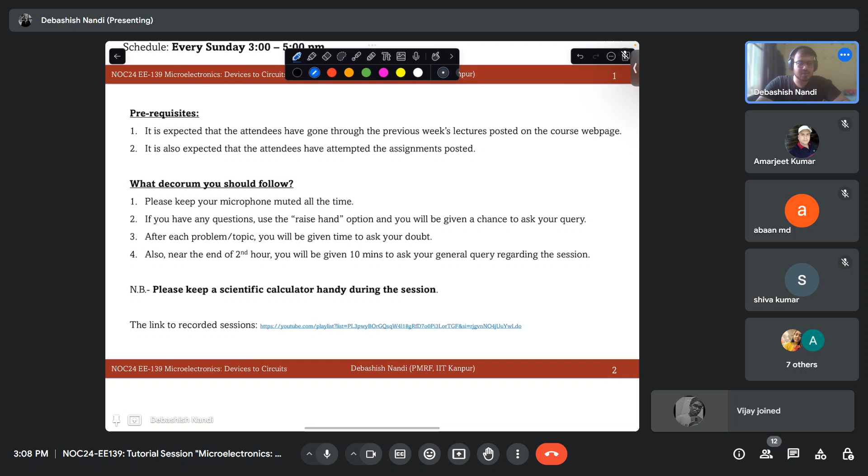So the first question is, before going to that, let me just ask you one thing. This I intended to cover last day. We see these PN junctions drawn, these BJTs drawn like this, right? So can anyone tell me, is BJT a planar device? How is the technology about? By the way, what is a planar device and what is a vertical device?

Does a BJT look like this only in real life when you fabricate them? No sir. So how does it look like? It is actually vertical, like they are fabricated first N, then P, then N.

Okay, you mean to say we will have an N plus, then we will have a well of, let's say this. So what is the bottom part? Which one is that, emitter or collector? What is the substrate that we will work on? Sir, the bottom part is base, then we come to emitter, then I think inside the collector comes. So this is your collector, right? Let's say this is your lowest doping part.

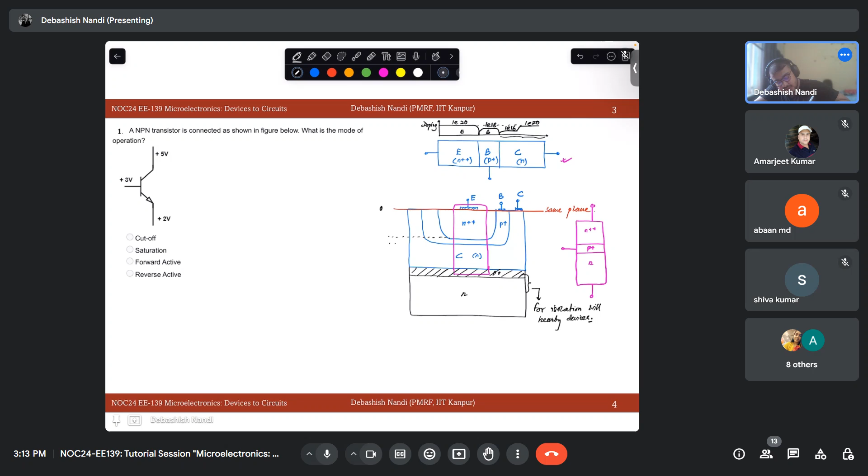These wafers are very thin. For example, if I take this point as 0, the dimensions are typically, let's say, 2 micrometers here, 3 micrometers here. You see that the base should obviously be narrow - we discussed this last time and we'll touch upon it today. Then let's say this is 10 micrometers, and then for the rest we have to break the scale, otherwise I cannot write on the same scale. Let's say it is 200 micrometers.

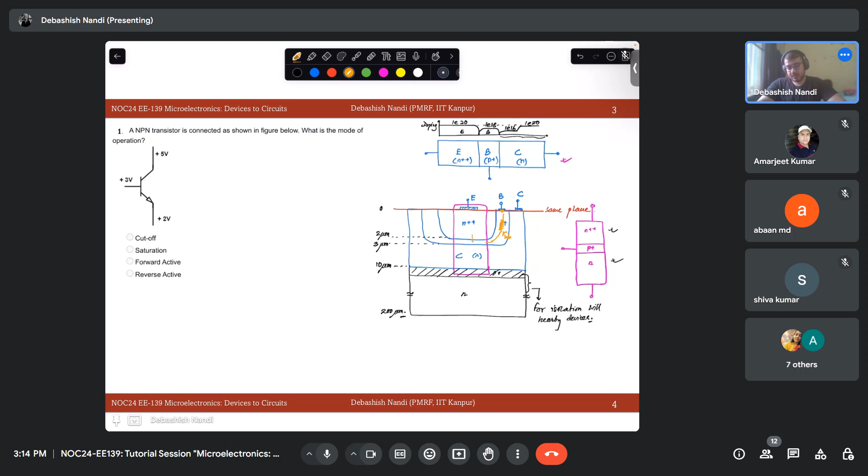So we are talking about just this much of the device. When you go to the physical device, there will be so many other effects. For example, let's say your base contact is here, but you are considering your transport at this point. So there will be a series resistance associated with this - we call it RBB. This comes into picture in high frequency operation, and there are other capacitances involved that determine your FT, meaning unity gain frequency, F max, etc. of the device.

Now let us discuss the regions of operation. What do we have in a BJT? We have two junctions: one we call EBJ, the emitter base junction, and the other is the CBJ, the collector base junction. Based upon the condition of these two PN junctions, we can have four regions of operation in a BJT.

So what are those? Regions of operation: we have EBJ, we have CBJ, and then we have the operation mode. Let's start with both reverse biased. Then what will happen? What is the operation mode?

Anyone? You can unmute and answer. Cut off. Why do you say so? There is no current. Why will there not be any current?

Why, let's say, take your emitter base junction - it has to be forward biased. Why do we need that? The electrons or holes are coming from emitter to base - for an NPN transistor electrons will be injected forward, so you need injection of carriers across this point. We know that in a PN junction, we have to have forward bias over and above equilibrium to have injection of carriers so that the excess minority carrier can reach the other side. And how does that happen?

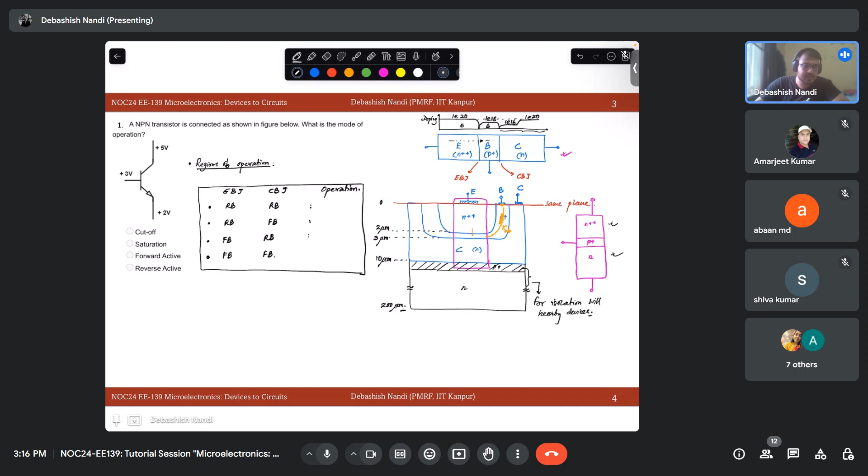If you remember your PN junction band diagrams, let's say this is your P side and this is your N side - or I should draw it differently since I was talking about NPN. So how does your carrier move? You have a metal contact at this position. Now you are applying forward bias to this junction. So what will happen? Your energy barriers will come down - this is your applied forward bias.

Okay, this is your applied forward bias. Let's say this is qVBE. This is your emitter, this is your base. So if this much energy is reduced, what happens? This is what scale, by the way, in the band diagram?

What is this energy axis? What energy? Energy is energy, not sufficient. It is electronic energy, right?

It acts weirdly, differently than a voltage. Voltage, or potential, as I mentioned last class, is defined in any field as the work needed to bring a positive charge from infinity to that point. So potential is associated with a positive sense. That means if this point has higher potential than this point, you can tell it has higher positive charge in some sense. But in the energy band diagram, what we plot is the electronic energy.

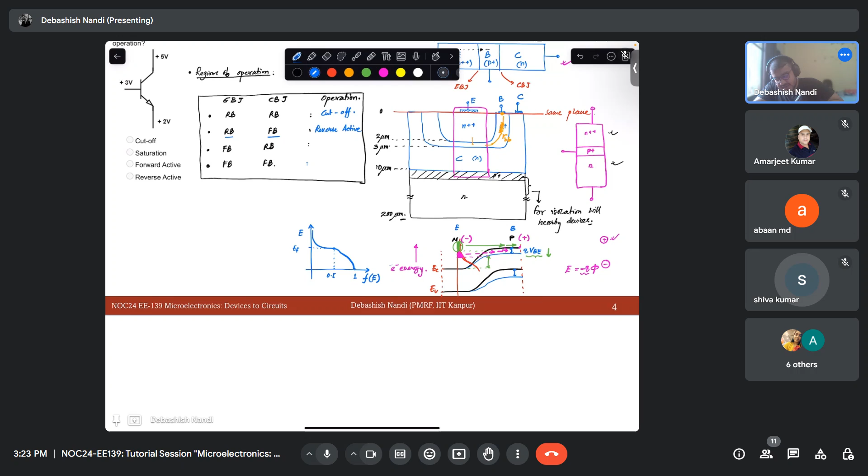Reverse active, right. Reverse active means your emitter-base junction is reverse biased and your collector-base junction is forward biased. That means all the considerations made by making this region highly doped and this one less doped are reversed. That means it is a very bad transistor, but it is still a transistor, just a very bad one in active region. So this is reverse active mode.

So there are very niche applications in earlier days when reverse active modes were used. Nowadays this mode is just not used at all for that sake. And what is this mode? This is the most common mode of transistor application.

Forward active. This is forward active, right? And this is the region where most of your amplifiers work. And what about when both of them are forward biased?

Saturation. We'll see why it is called saturation and what are the large signal models of saturation.

Okay, so now what is happening? Last class I told you how to read the notation of the transistor. So this is an arrow this side, this will be your P side, this will be your N side. So obviously this is P side, this is N side. So it is an NPN transistor. This is between emitter and base junction. This is your base, this is your emitter, this is your collector.

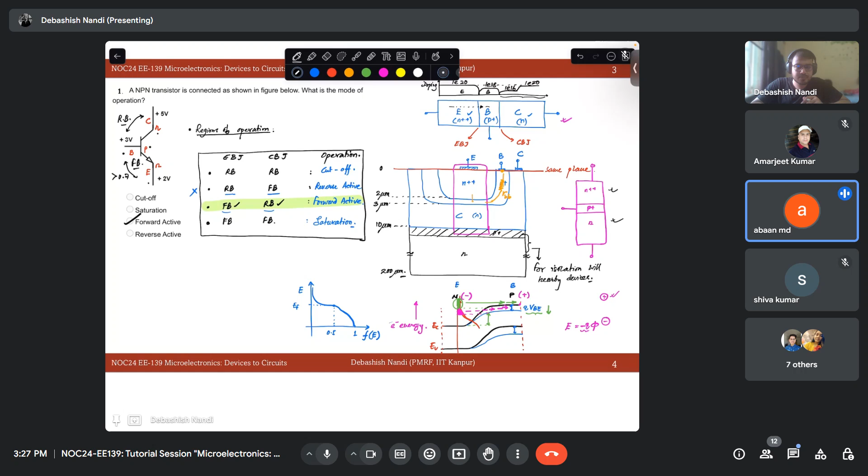A base should be less doped, but in the profile, collector should be least doped. Yes, you see that profile, right?

This is highest doping, then this, then a very small region in the collector has small doping. Then to avoid the series resistance drop, because resistance is proportional to rho, that is 1 over sigma. Sigma is proportional to n doping times charge times mobility. So if you reduce doping in the collector, resistance will increase. To avoid that, you make a very small region in the collector less doped, and then have a sudden jump in the doping similar to the order of the emitter.

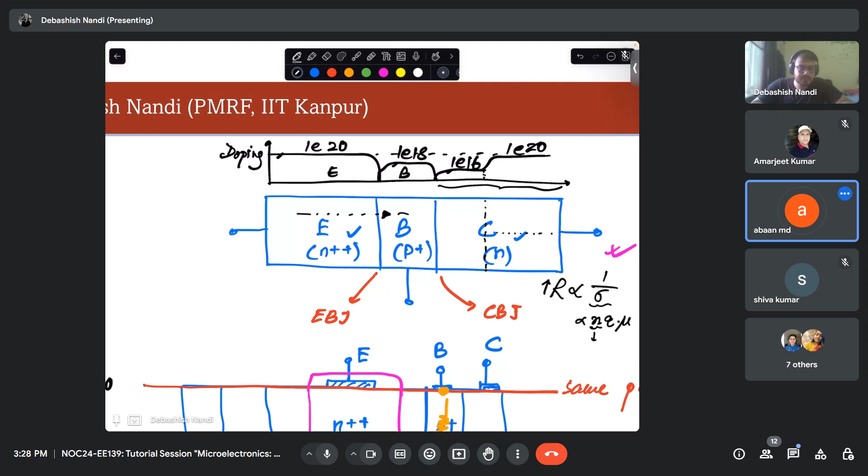Okay sir. So yeah, in this context, we are discussing amplifiers. We will be discussing amplifiers today. So it is the right time to discuss why the forward active region is used for amplifiers and how BJT amplifies. It's an open discussion, so anyone can chip in.

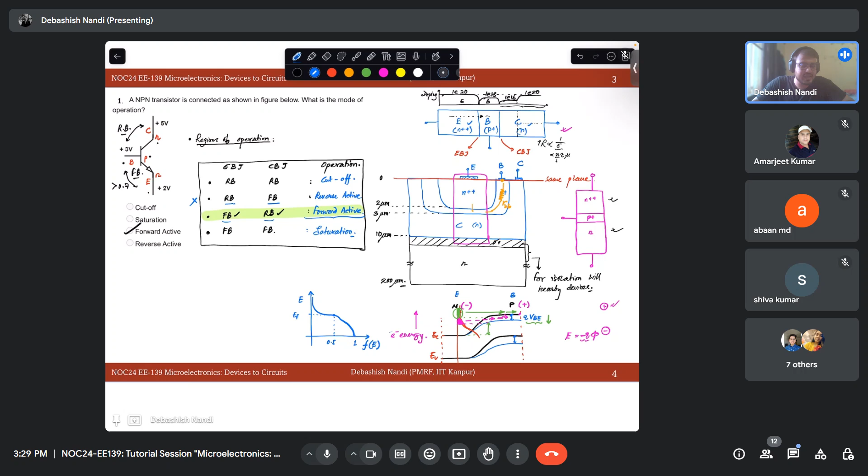So the question we are asking is why BJT, for that matter, let me put it this way: why can BJT be used as an amplifier? Question number one. Question number two is why forward active mode.

So what is the most important thing required for amplification? Can a diode give me amplification? And what kind of amplification are we talking about? We are talking about power amplification. If I put a small signal, my output should be something bigger. So this is the amplification we are talking about.

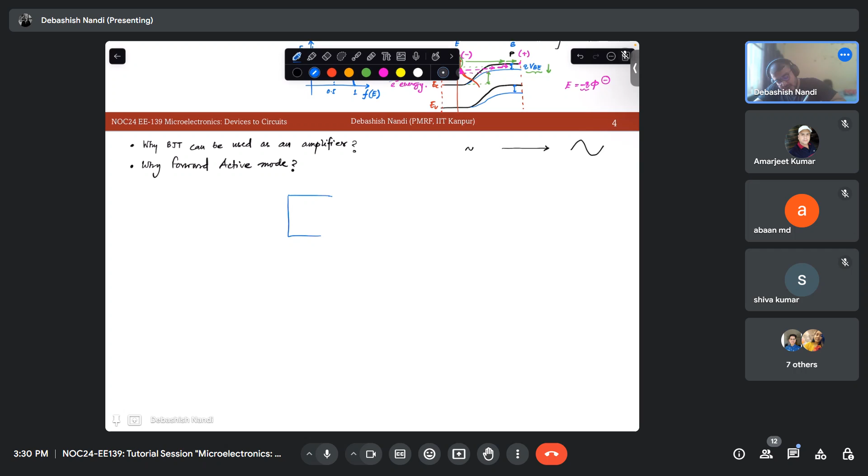So let's see it this way. Let's say you have a block. Last class we discussed why three terminal devices are required for transistor action. So now let's say you take a linear network, and this is your V1, this is your V2, this is your I2, this is your I1.

So what is your P input? Power in is V1 times I1. And what is your P out? P out is minus V2 times I2. So can you comment on the relative magnitude of these two things?

Means, will your P in be greater than P out, or will P out be greater than P in? What do you think? Equal. Why equal? You have a linear network inside, right?

That network has to have some losses. So this network will obviously incur some losses in terms of maybe heat. So always your P out will be less than your P in. Do you agree with this statement? You are putting some power in and taking some power out, but for that system to work, there will be certain losses because the resistance cannot be zero, right? It has to have some finite resistance. So your P in is always greater than your P out.

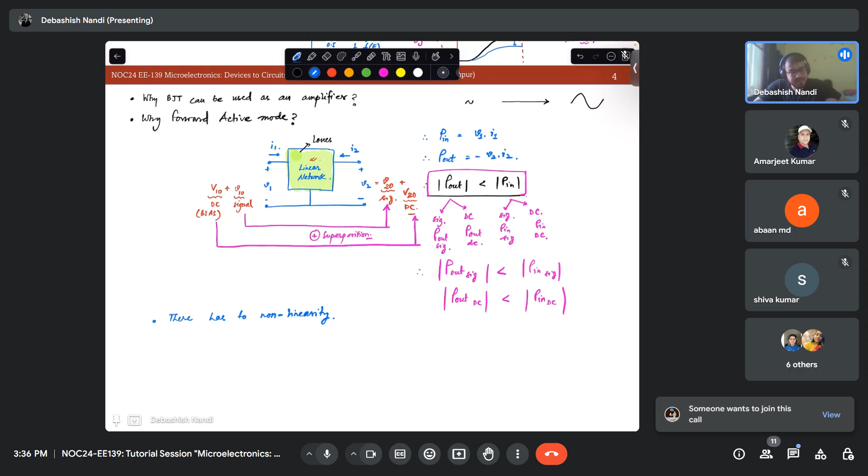So in a BJT, where is that nonlinearity coming from? What is your input in a BJT? Let's say your VBE. What is your output? Let's say you take IC as your output. So your IC will be some saturation current times e to the power VBE by your thermal voltage, right? I am ignoring the minus 1 part. So this is your output, this is your input. So there is a nonlinear relationship that leads ultimately to the amplification we see in the device.

Having said that, what does nonlinearity actually mean? Is everyone comfortable with Fourier transform? Is anyone uncomfortable with Fourier transform? Then I'll discuss the concepts in a different way. Okay, let me put it in this way.

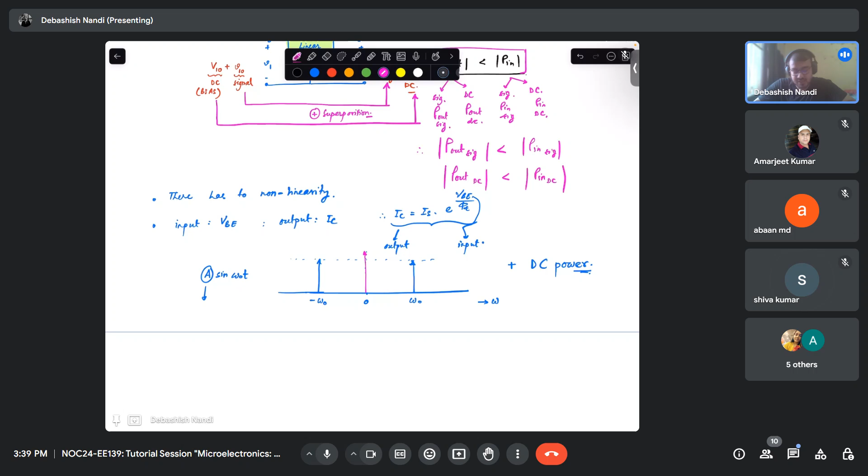Okay, so what do we want to amplify actually? We want to increase these signal levels, these power levels of this signal. In time domain, in frequency domain, powers are same, right? Parseval's theorem. So we want at these frequencies power to increase.

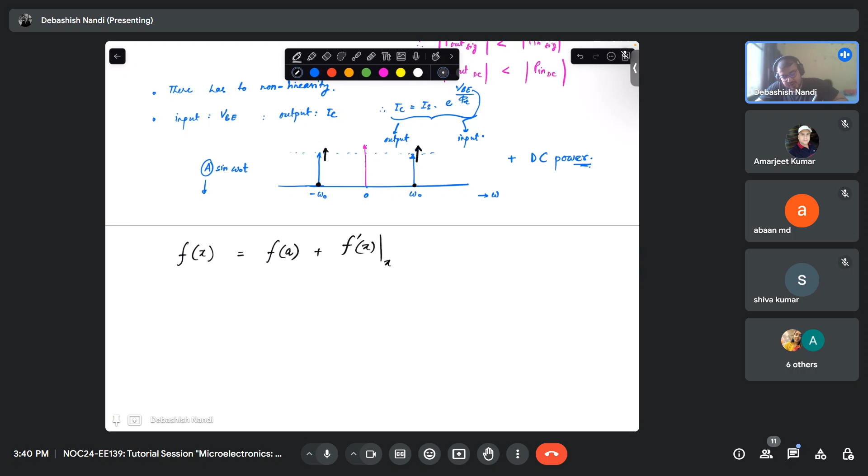Now, if we have a linear network, understand this carefully, there will not be a frequency translation. That means any nonlinear function, you can Taylor expand it. Let's say f of x, around a. So you will have f of a, then f dash of x at x equal to a, times x minus a, then f double dash of x at x equal to a, divided by factorial 2 times x minus a square. This is how a typical nonlinear function looks like.

Now this is your linear stuff. If you draw just input x versus f of x, and if you ignore these higher order terms, then this quantity is just a straight line. Y equal to mx plus c.

But when these second order terms start to come into picture, what will happen? Your input, let's say x is equal to a sine omega naught t. So if I have some kind of x square, then sine square will produce a frequency of 2 omega naught. So it will start to produce harmonics at 2 omega naught, then minus 2 omega naught. Then if we have a third order term, other things. If we have other frequencies, things will get intermodulated.

So the purpose of saying this is that nonlinearity is required for what? Transferring power from one frequency to another frequency. Do you agree with that statement? Nonlinearity is required to transfer power from one frequency to another.

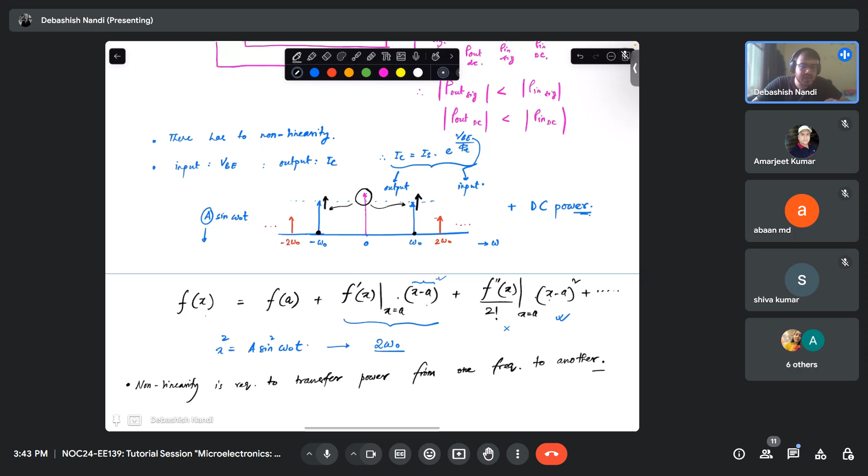In amplifiers, what happens is that the power you are having in DC, if we do the rigorous mathematics, you can see that it gets transferred to your input signal power, and that's how you have power amplification at the output. So your bias, what you apply, that is providing the additional energy source. Otherwise, if you do not have nonlinearity, your output signal power will be lesser than your input signal power. So this has to be transmitted via what? Via nonlinearity of the input and output of the device.

So nonlinearity is essential for amplification of small signals. Okay, one point is that.

Another point is, why do we choose forward active mode? We have discussed this, right? BJT has this inherent nonlinearity and transistor action. That means something happening at one terminal can be controlled by something happening at another terminal. We discussed this in the last lecture.

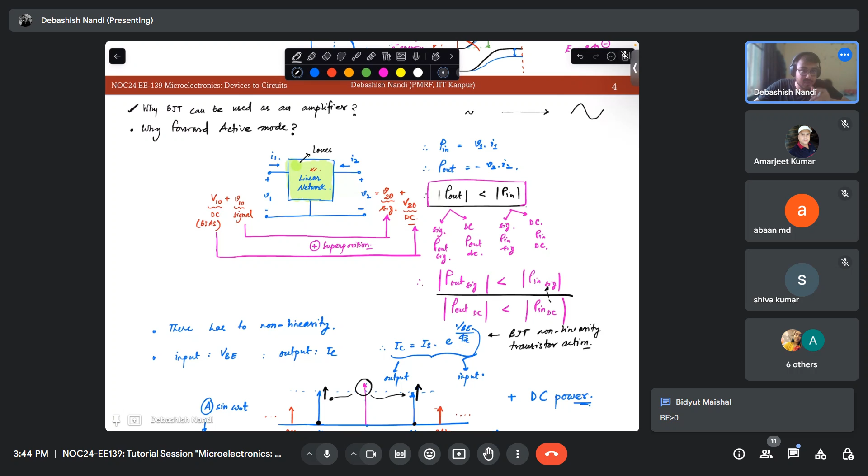So now, why forward active mode? What is very special about the forward active mode? Can anyone tell? Why do amplifiers operate at that region? If you know, then it is fine, otherwise I'll explain. This is a very important concept, because we will be discussing amplifiers without knowing why we are biasing it in forward active. This will be kind of a sin, right? So you should know why amplifiers are biased at forward active. So what is the basic take on that?

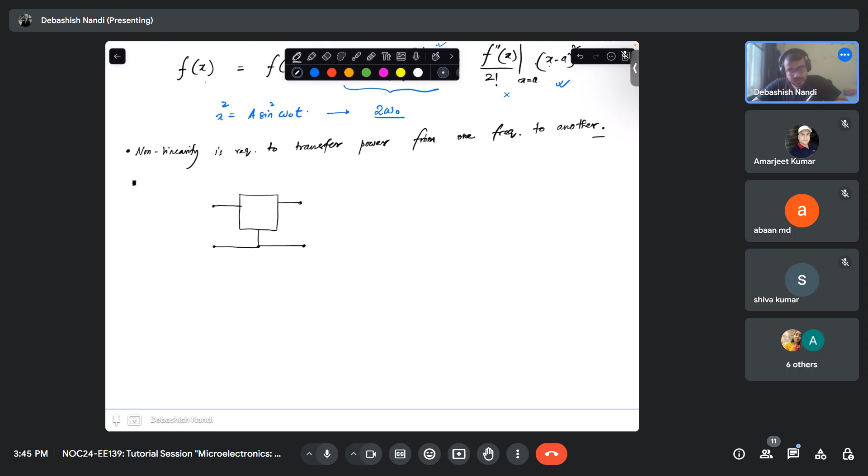Okay, just let me explain. So let's say you have a network. Can I express my transistor in this form? This is your one terminal, let's say the emitter terminal. This is your base terminal. This is your collector terminal. So this is simply your common emitter configuration. This box, I am not telling you what it is right now because I will go into a general analysis.

So let's say you have a source here. This is your I1, this is your V1, this is your V2, and this is your I2. So this is ultimately a two-port network. I can use any set of parameters: Z parameters, Y parameters, H parameters, ABCD parameters. I choose to use Y parameter for the time being.

So my I1 is a function of V1 and V2, and my I2 is a function of V1 and V2.

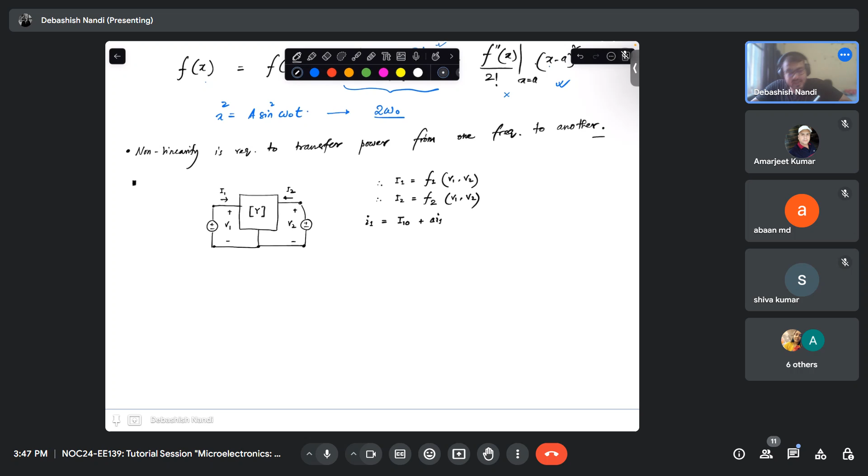Now let's assume our scenario, what we are discussing, that we have I1 something like this: your I10, that is your DC, and some small I1, that is the small signal riding on top of that DC bias, because that is what we want to amplify. What I am speaking right now is the small signal.

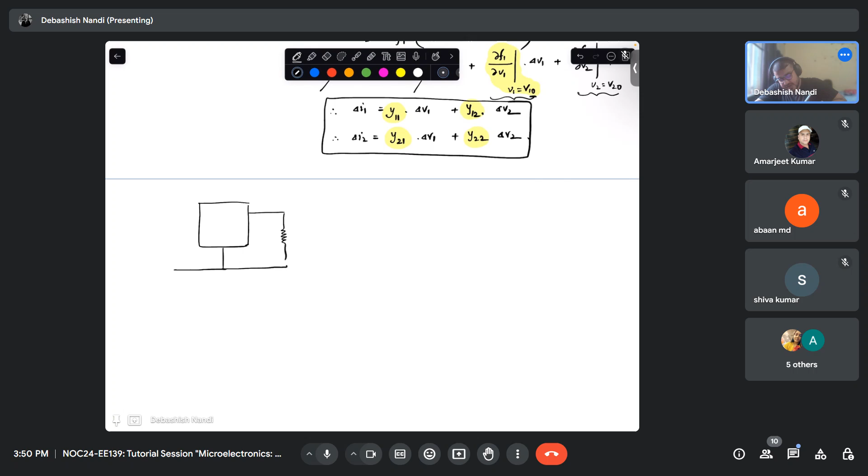So now if I take the same network and connect it in a real world scenario, for example, this is your RL, this is your V source, this is your R source, and it's connected like this, the same network, or the same BJT for that matter. That is your Y11, Y12, Y21, Y22. These are nothing but the derivative of the current with respect to voltages around that bias point. So now let's say this is your I1, this is your I2, this is your V2, and this is your V1.

Okay, so what do we have? We have I1 is equal to Y11 V1 plus Y12 V2. I2 is equal to Y21 V1 plus Y22 V2. And what do we have? I2 is equal to minus V2 by RL. I can write it simply as GL in terms of conductance. GL is nothing but 1 over RL. And similarly, what is your I1? I1 will be Vs minus V1, times your GS. And what is GS? GS is 1 over RS.

So from these equations, can you solve V2 over Vs, which will provide me the ultimate gain? V2 over Vs, if you see, it will be something like this: Y21 times GS, and if you manipulate the equations, you will have a term here with Y21, Y12, then you will have Y11 plus GS, times Y22 plus GL. Okay, so this is your final voltage gain.

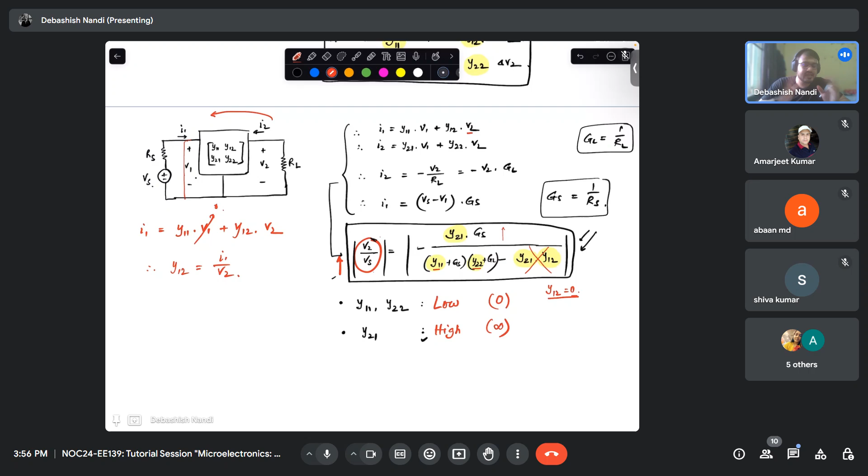Now let me take you to the BJT parlance. What is the input port in the BJT? For our case, let's say port 1 is the input, which in our case is B, and port 2 is collector. Let us assume we are discussing the common emitter scenario.

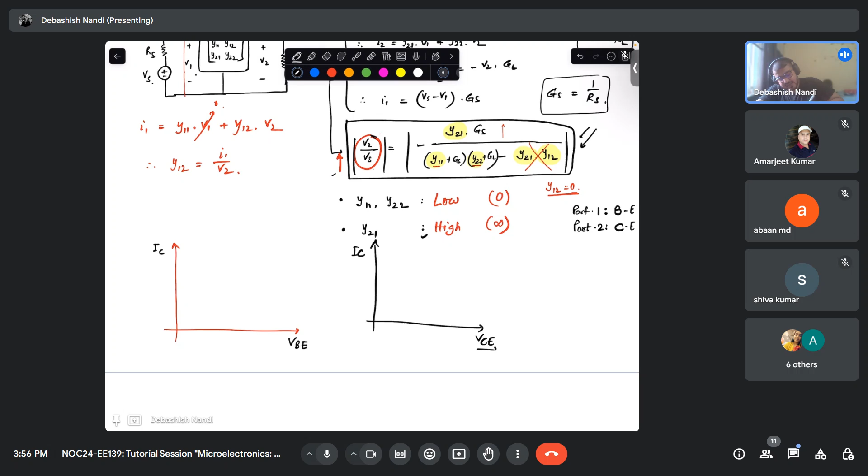So how does your IC versus VBE look like, and how does your VCE and IC look like? This plot is just like a diode, and this plot is something like this. Do you agree? Have you seen these plots?

Anyone? Is it IC or IB? IC and IB, in the first case? IC is equal to beta times IB, right? That is the same thing.

This is your output current, meaning in our notation it was I2. And this is your what? This is your V1, this is your V2, and this is your I2. So what is your IC?

IC is equal to IS times exponential VBE over phi t, isn't it? So I can draw this plot, right? Is it okay for you guys?

Yes sir, we are going to a very interesting part: how do we choose the bias point for amplifiers? So ideally, from this equation and this consideration, how should my I2 versus V1 and I2 versus V2 look like?

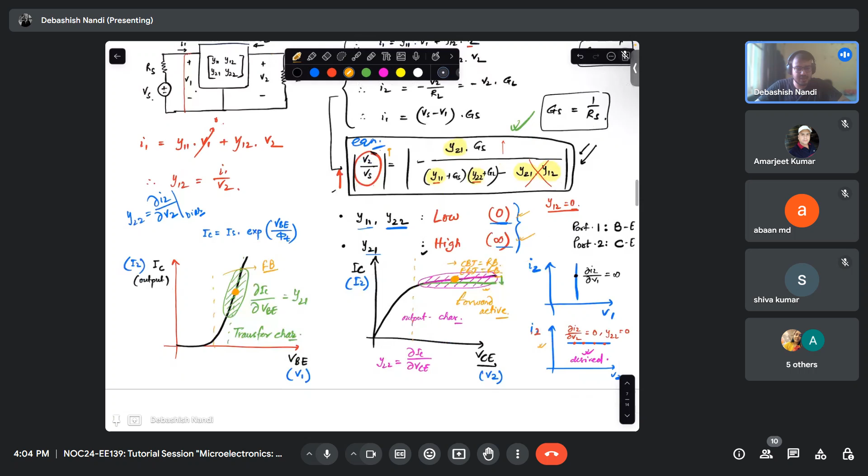So let's move on to the next problem. So what does it tell? At the beginning,

an electronics student just learning about transistors reads in the textbook that a bipolar transistor can be thought of as two diodes connected back to back. Acting on this idea, the student proceeds to connect two PN junction diodes,

rectifying diodes back to back and tries to use it as a transistor. The idea does not work, although the diode pair reads the same pattern of continuity. Because this is the same pattern of continuity, it does not amplify. Explain why. Can anyone answer that? Why does it happen so?

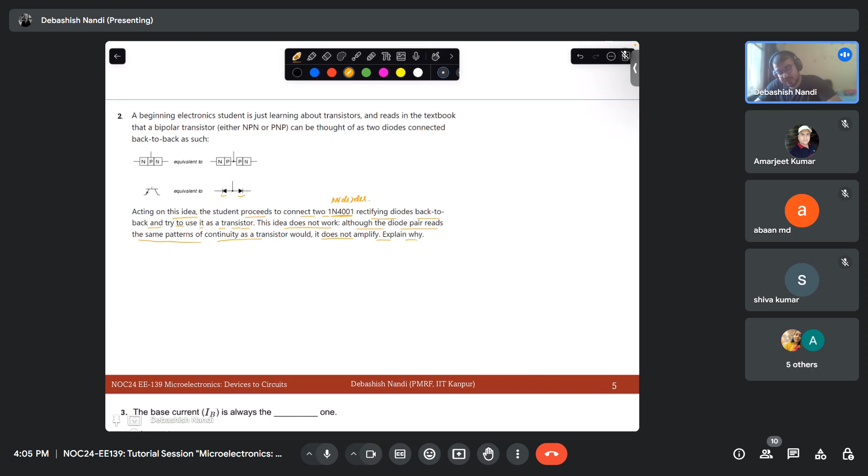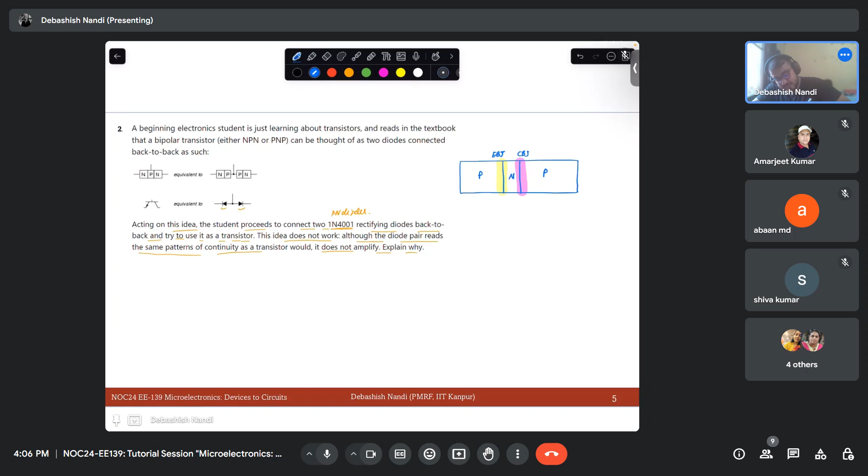this kind of connection. And what they are telling is that in lab you try this one. This is your PN, then this is your NP. You connect it like this and you connect these things and take another point. So this is your base, this is emitter. Let's say this is collector. For the sake of notation, let us be consistent. Okay, so you connect it like that.

So this amplifies, this does not amplify. Why?

The base region should be very thin so that the velocity of that electron should pass through that barrier and move forward to the collector. Velocity means movement, that's the right term. Yeah, you are very close. Actually, I am very impressed with the answer. It is actually the reason, but there is a little bit of information missing.

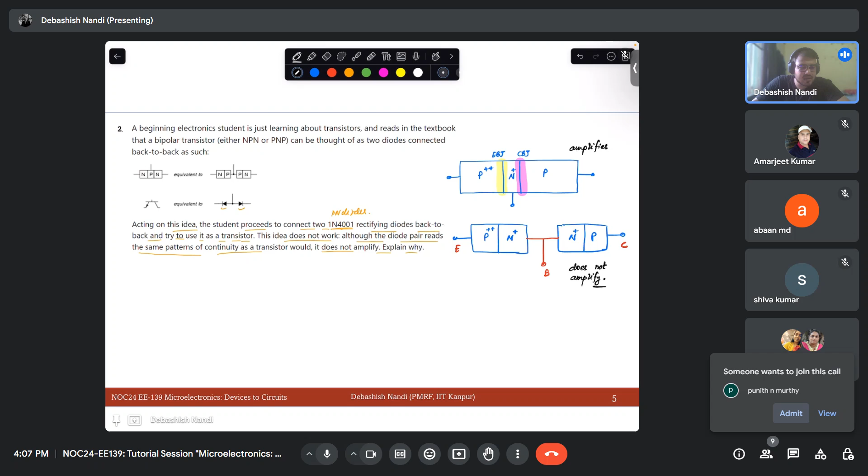By the way, can you tell me why does BJT amplify? We have discussed this in the last class, but again, I just wanted to revisit it.

Okay, let us put it in this way. We had a PN junction, right? We had a PN junction in our lab. Now, how did people think that we should have a third terminal connected? Meaning, how did people first think that from PN junction to BJT there can be amplification? What is that thought?

Have you ever thought about this, that we have the PN junction theory, now we have a BJT? What should have been the thought process behind that, that this can be done, because that's how they invented it, right? So for that matter, if you want to win a Nobel Prize later in your career, you should have those kinds of thought processes about how one thing was derived from the other.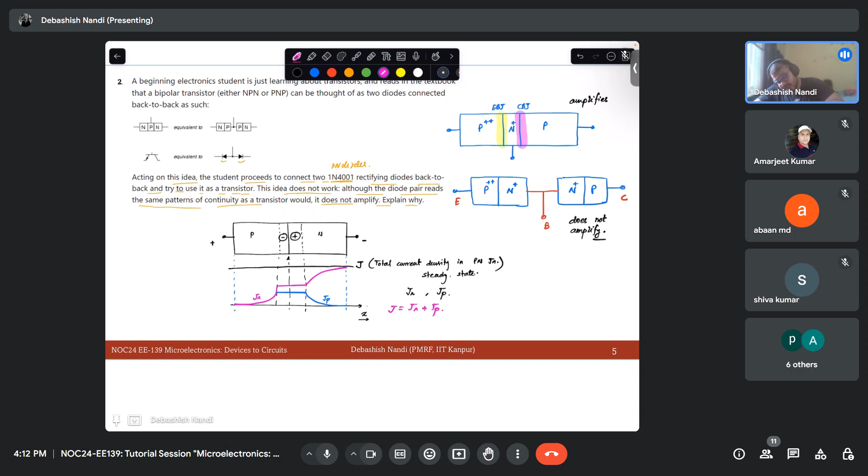Similarly, this will follow this and reach your J. So this is your majority carrier current in N side, and this is your majority carrier current in P side.

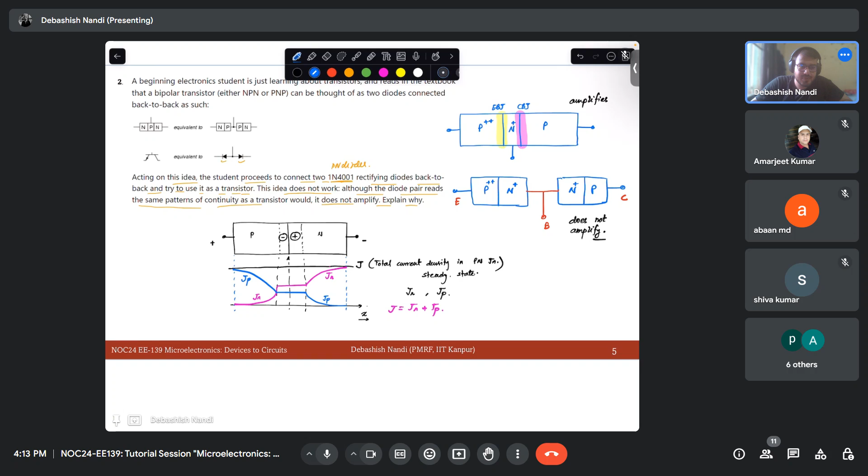So are you guys familiar with this plot? Have you ever seen this plot in your PN junction course? Have you seen this plot? You haven't seen? Now I am surprised. Okay, someone is telling that you have seen.

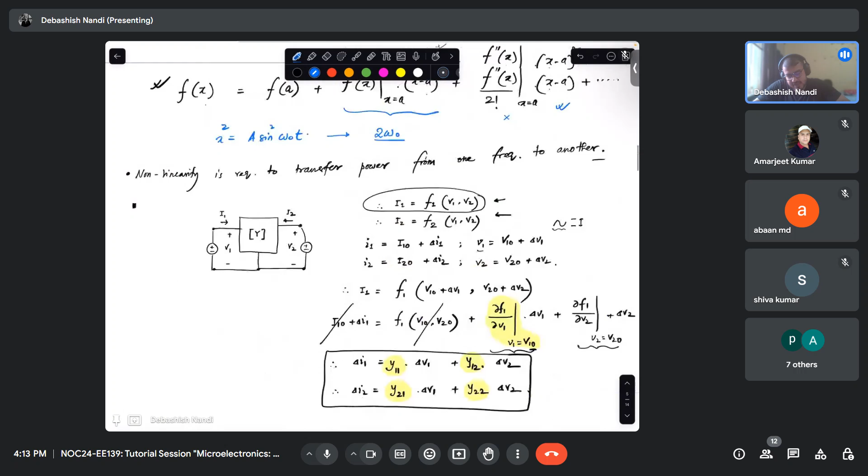So, by the way, how does current flow in PN junctions? What are the mechanisms, right? I have told you earlier that this is your N side, this is your P side. So electrons will move from this place to this place. Once electron moves at this edge, right?

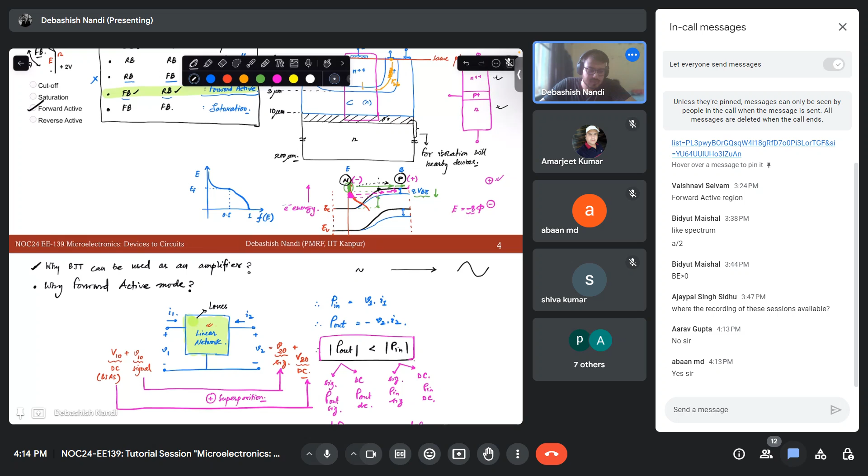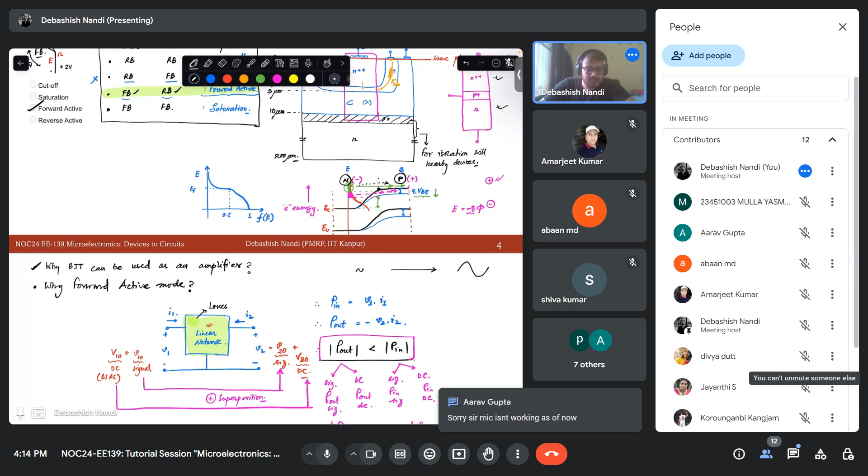How does electron move in P type region? Who was that? Aarav Gupta, can you please unmute? Aarav Gupta. Okay, mic is not working. Okay, then how will we discuss?

Okay, think in this way that your electrode is injecting electrons, you are having a forward bias, your barrier difference have reduced, so more number of carriers can flow. Once it crosses its own territory, that means once this electron crosses N type to P type, in P type it is a minority carrier, right?

And how does a minority carrier move in a material? The minority carrier will obviously, because there are less number of electrons and too many holes in p type, eventually recombine. This process, what we call minority carrier diffusion, diffuses and recombines in what time frame? During its lifetime, around its diffusion length.

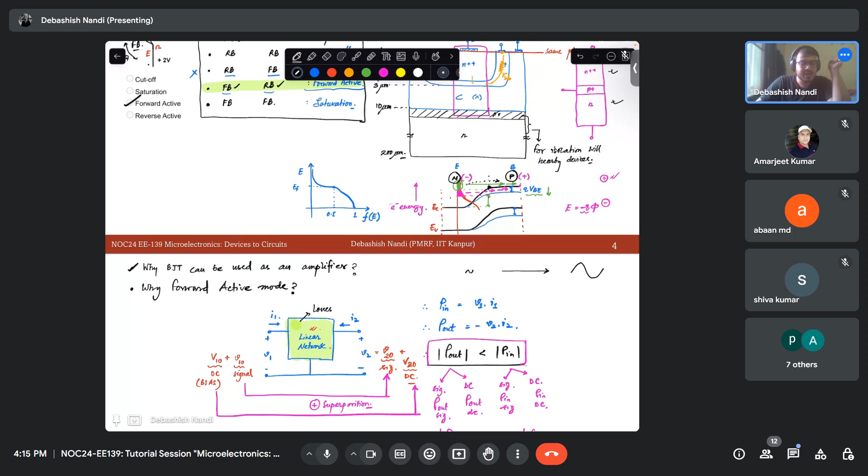Okay, these are the basic physics concepts which you should have before joining this course. If not, please revisit and check that this is a very standard plot. These are the current contributions in the PN junctions, right?

So now I want to get amplification. So what thing should I have? I want to have a certain mechanism by which, before this Jp recombines completely, if I can get it into another region where it is a majority, then I may get some amplification, some sort of amplification. And how do we do that?

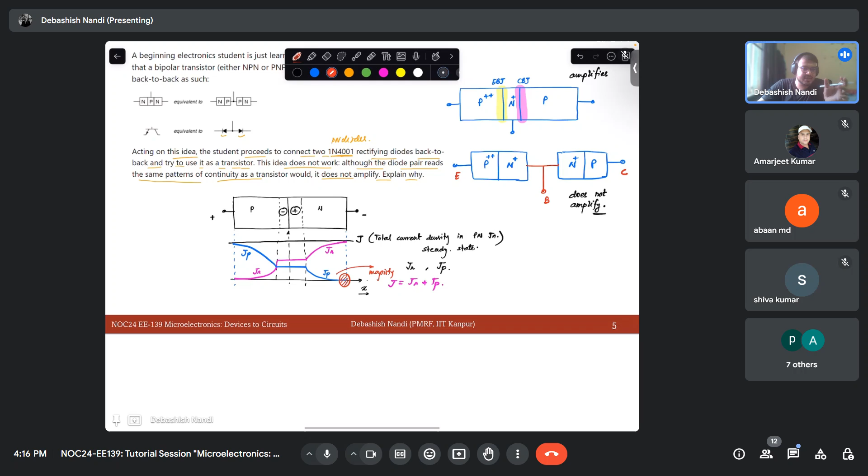By connecting another p-type material just adjacent to it. That means now what I have, so this was my depletion region. So this is my p plus, this is my n plus, then this is my p. So I have added this additional region, right?

Now what happens is that in the base region, so far we had drawn this diagram in this format, right? This is PN junction, this is something like that, and we had this, and this. So this part we have seen here. Now we want to have these carriers cross over here and become a majority carrier so that it can contribute to the bulk portion of the current, right?

One thing you notice throughout in this plot is that your majority carrier current is always higher than your minority carrier current, right? For example, in p type, you can see that in most of the bulk region your majority carrier current is much higher. So there is one sentence we learn in our undergrad, that current in PN junction flows due to minority carriers. That is not true. The profile of the current in PN junction is dictated by the profile of the minority carrier current in respective regions. But the majority portion of the current, as you can see from this plot, magnitude-wise the majority carrier current obviously carries the bulk portion or the major chunk of the current.

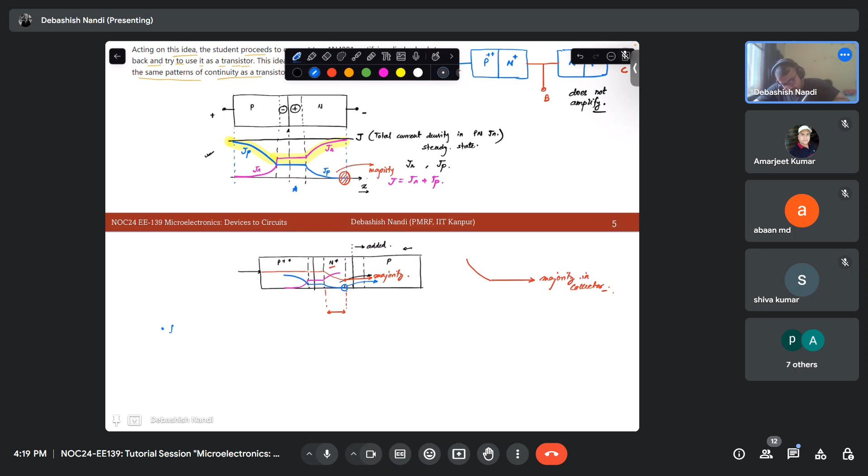Okay, so this is the primary reason behind the thought of how a PN junction can be used as an amplifier, and then the concept of BJT came into picture. Now the important thing is that in the base region, we must not have all minority carriers, in our case holes, recombined, right?

So we cannot allow all the minority carriers in this region to recombine. So one way to do that is to reduce your base width. That is why we have a very narrow base in the BJTs.

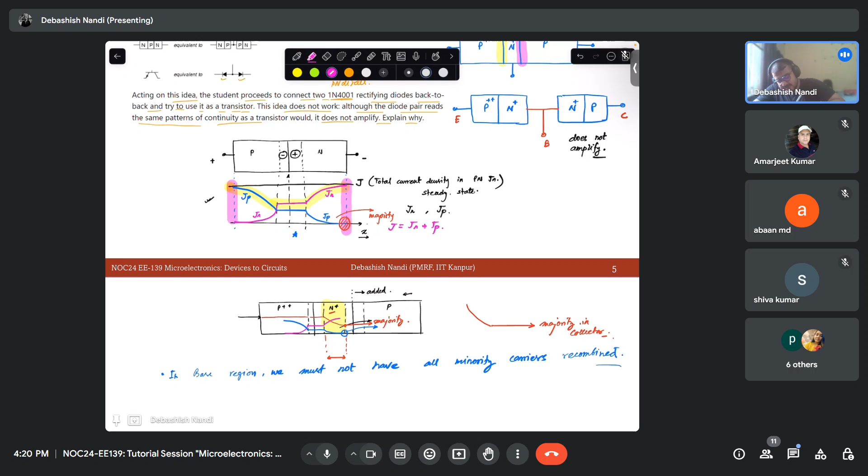Now coming back to our question, in a PN junction, why do you think that JP in this place, JP in this place, and JN in this place becomes zero? Which part do you want me to repeat?

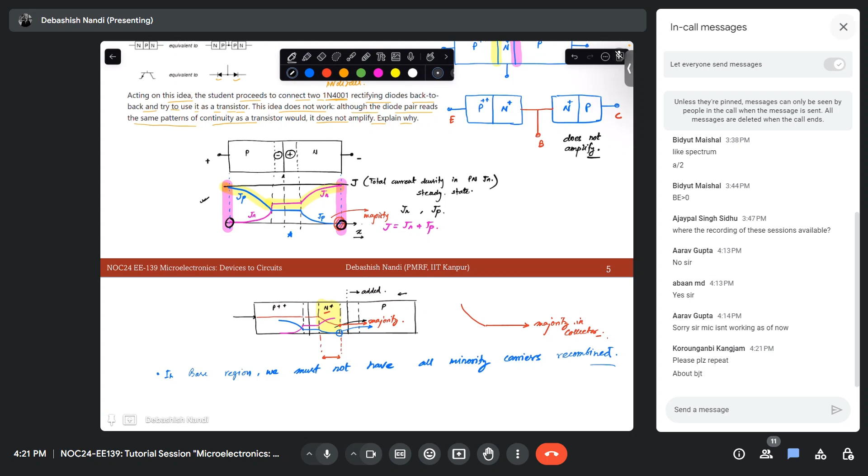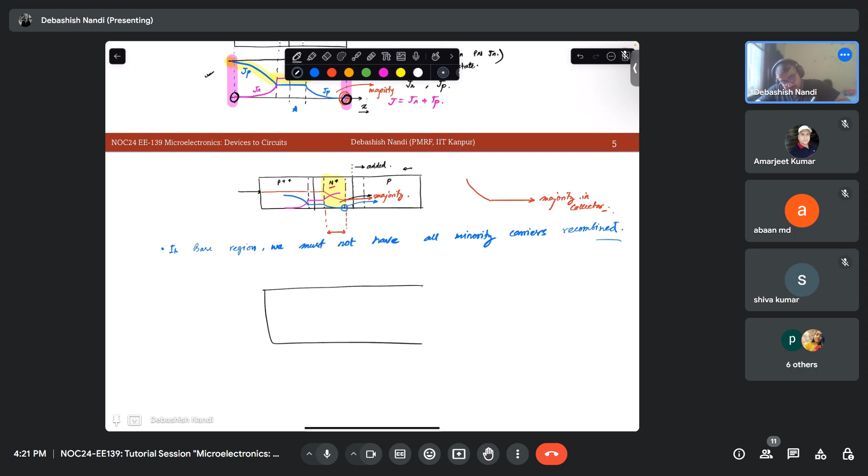Okay, about the BJT. Let me draw it again. So this is my base, this is my emitter, this is my collector. Let's say this is P plus plus type, this is N type, and this is P type. Now you have this junction forward biased, and this junction reverse biased.

So holes will be injected in this region, then holes will cross through. Let's also draw the depletion regions. So holes will cross through this region.

Whenever the hole has reached this point or this point, what will happen to the holes? Am I audible, by the way? Can anyone confirm? Okay, fine. So when my holes cross and come back to this N-type region, what will happen to the holes?

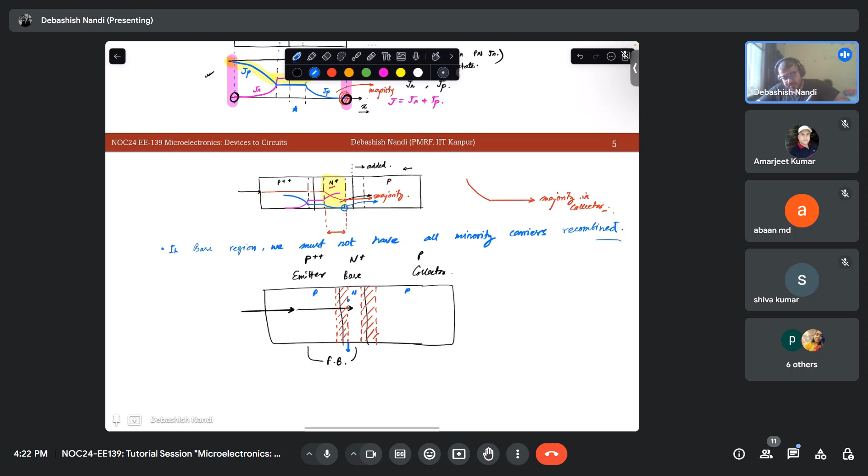These holes become a minority carrier, right? Once these holes become a minority carrier, it starts to recombine. The same thing we have seen in the PN junction. It starts to recombine as we move along the N-type region.

So what happens is that the concentration of the hole, if you plot the concentration, the excess carrier concentration as we call it, will start to drop. This is your delta P in the N region. This will start to drop.

So I don't want all this hole to recombine and become zero. I want to send it through the collector junction, into the collector, so that there it can become a majority carrier again.

So the way to do that is that you reduce your base width. Think of it physically: as you reduce your base width, you keep pushing your collector-base junction towards this side. What you are essentially doing is reducing the area, or the space, for the recombination. And how does that help?

That helps in reducing the recombination, so that at this point you have a certain amount of excess carrier still remaining, or more essentially, this slope is intact. You want to keep the slope at this point the same, right?

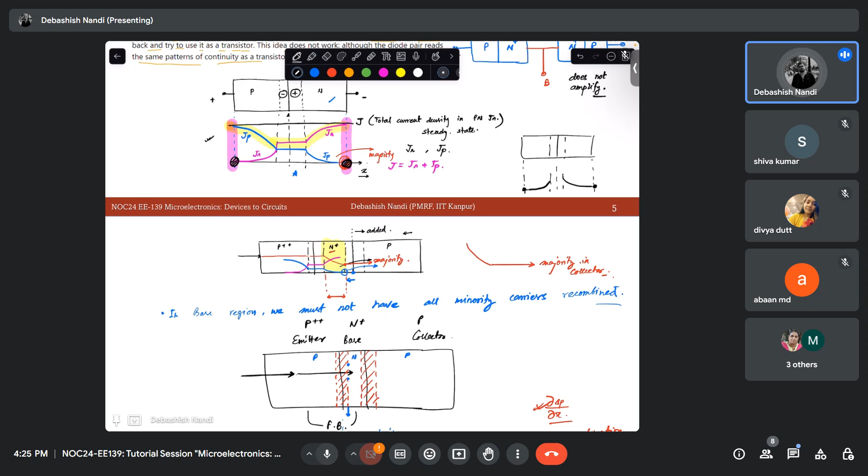Can anyone unmute and answer that? Anyone? Why does the minority carrier diffusion become complete at the contacts or boundary, such that basically all the minority carriers recombine there? Why at the boundary do all of the minority carriers recombine? That is the question.

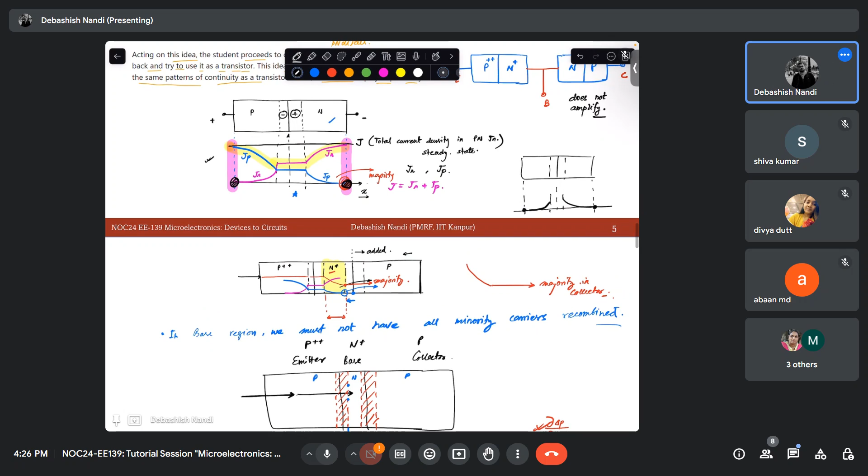By the way, what do you think we have at these boundaries? What are these boundaries? Semiconductor? Sorry? No, no, at these boundaries, what do we have? Like metal contacts - we have metal contacts, right?

Always remember that whenever we are talking about a PN junction, there are metal contacts at the ends. So the question now is why at the metal contacts do all the minority carriers recombine? This is a very deep question. I just want to know if you know the answer or not.

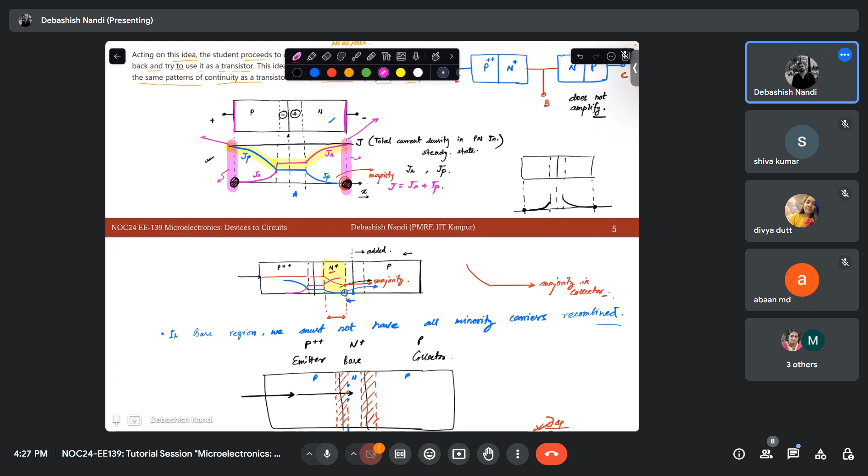Whenever a semiconductor metal contact forms, there are what? Semiconductor is a crystal, right? So the periodicity will be broken at the boundary, so there are so many recombination centers within the energy band gap.

I will not elaborate on this, just hear me out that there are so many recombination centers in the metal-semiconductor contact because the semiconductor periodicity is getting terminated. There are so many states through which the electron and hole can recombine. These are called surface recombinations. So due to infinite surface recombination at the metal contacts, all your minority carriers have to recombine at the metal contacts.

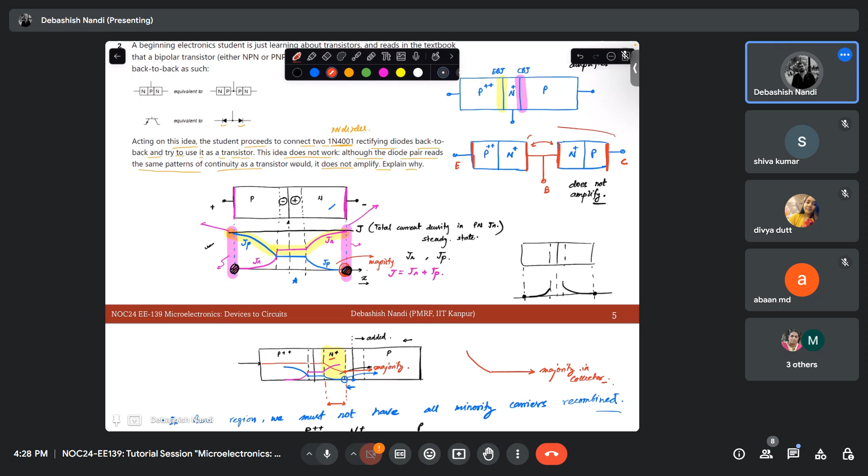Right? Now come back to this question. Here, what do you have? You have a metal contact here, a metal contact here, a metal contact here, a metal contact here. Sorry, not here, this place, right? So as soon as you connect two PN junction diodes back to back, there is a metal contact in between. That means if you just connect this thing, just let me copy it.

So if you just connect this thing, what will you see? You will see P plus plus, N plus, N plus, and P. But you have a metal contact in between when you connect two PN junctions back to back. That means this will act like infinite recombination.

That means your excess carrier has to become zero here, right? This excess carrier has to become zero here. So nothing will cross over this junction or this metal semiconductor contact.

So the basic essence of BJT functioning is that you want your base to be narrower so that this minority carrier can cross over here and become majority carrier. That opportunity is lost. What happens is all the minority carriers, all the holes coming from this side, get sucked into this metal contact and get recombined. So there is no collector current coming out, so there will be no amplification.

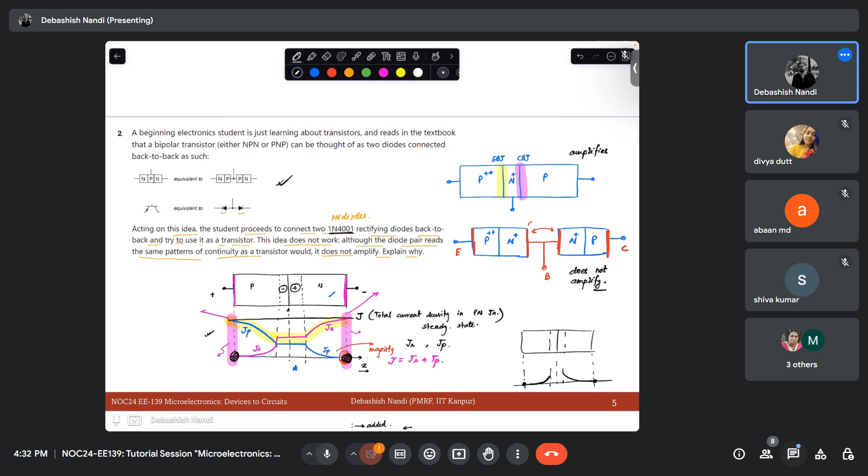Anyone have any question on this? This is a very interesting question, not your general textbook question. This kind of question will be asked in interviews, in your PhD, MTech interviews, or in job interviews in your core companies. So whatever purpose you are doing this course for, you should have clarity on these things, and this comes from understanding how the device works. Is that clear? Can I move on? I don't get any response. Yes sir, okay fine, so let's move on to the next question.

The base current is always the what? What is the answer? This is trivial - smallest. Why? By the way, what is the base current? Why do base current flow in the first place?

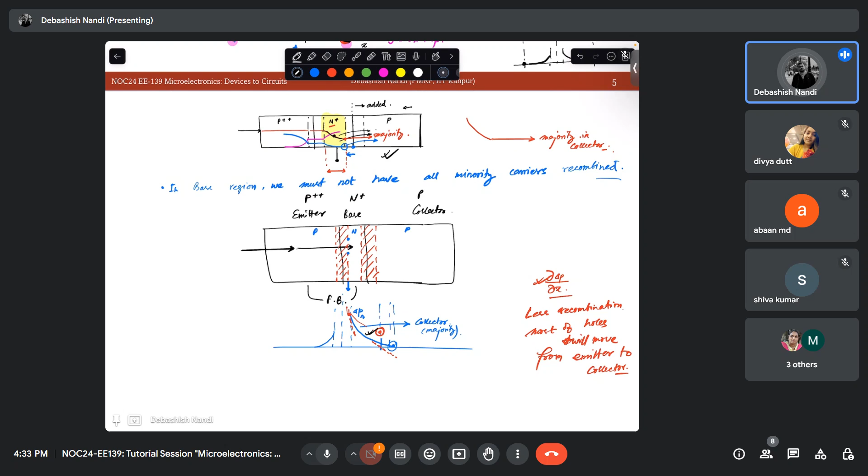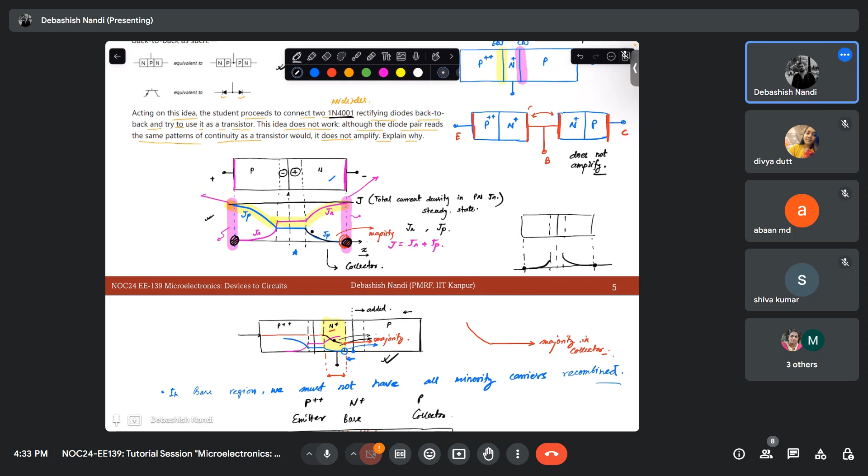In this diagram, you can easily tell, right? Why do base currents flow? Base current flows because some of your minority carriers will recombine in the base. Do you see this recombination current? Some of this will flow through this N terminal and the remaining will be sucked out to somewhere in the collector. So this current is basically due to the recombination in the base region. Okay, and how do you do that?

Tell me the recombination current formula - the recombination generation current formula. Does anyone remember? Okay let's do it this way. I equal to Q by tau. Q times T, and now you integrate it over the volume dx dy dz, or in other sense current is your recombination rate. In silicon it is SRH recombination, times dx dy dz.

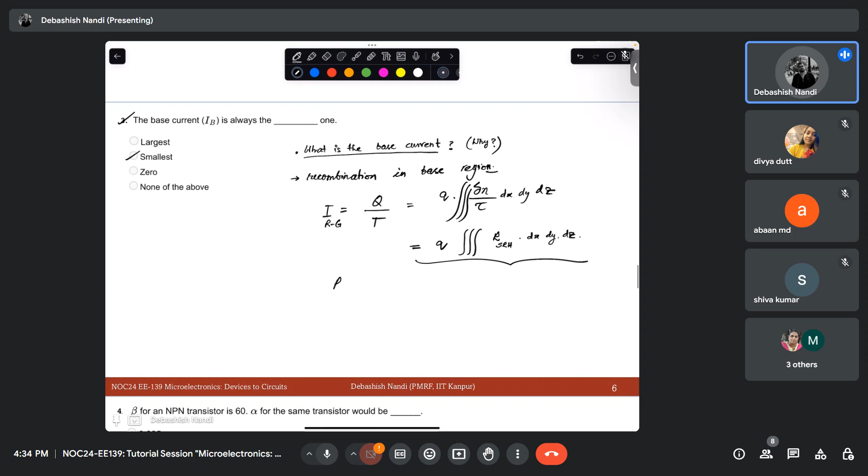So have you seen the recombination rate formula in SRH? Np minus Ni square divided by tau times n plus n0 plus n1, this is tau p plus tau n times n, this will be your p0 plus p1. This kind of formula - this p1 is nothing but the trap levels in the band gap, and what is the difference of that with respect to the conduction band and ei.

So if you integrate, put it here, integrate this two dimension, you can simply keep WLN out, or simply make the area outside. So you will get Q times area times this RSRH dx, let's say dx is the dimension in a PN junction - it will be the same in case of BJT also. So in this region you will have the depletion, right? Okay, so you will get that recombination generation current.

You just plug it in and you will have a formula something like Q W, W is nothing but this W, times area W depletion over area times Ni over tau times exponential Vd - let's say this is the diode voltage applied - by 2 phi t. This kind of expression you have seen in your PN junction courses. The generation recombination current in the depletion region has this kind of expression, and this comes from this derivation.

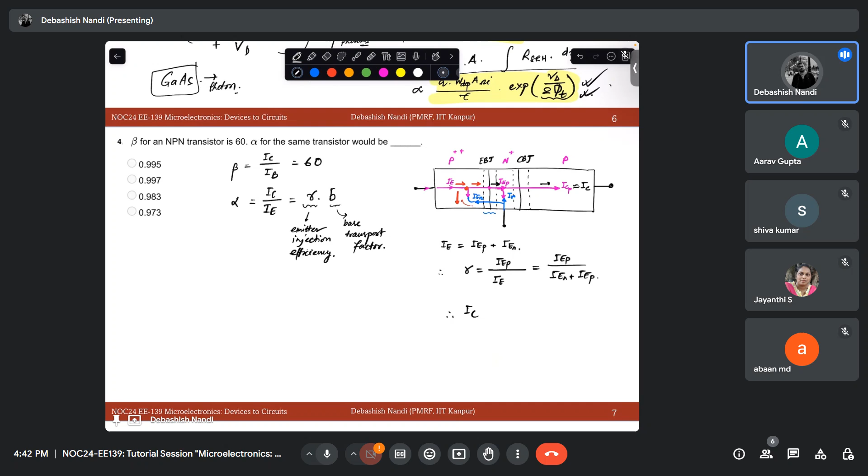Similarly, this is your IEP and this is your ICP. Let's say ICP is itself IC, and being in reverse bias, this current component of electrons is negligible for the time being. Let us assume that. So what is your IC? Applying KCL at this node, IC is nothing but IEP minus IR, right?

So your base transport factor is nothing but ICP over IEP, right? So now you want to define your alpha, that is IC over IE. What you do: you do it in two parts, IC over IEP times IEP over IE. This is your base transport factor B, this is your gamma.

So to increase your gamma, what do you generally do? You generally dope the emitter heavily with respect to your base, right? And to increase beta, because both have to be increased since this is a multiplication and I want to increase alpha, what do you do to increase beta?

This beta will basically increase if your IR can be reduced. If your IR can be reduced, that means your base needs to be narrower. So these are the design considerations from the technology point of view: how long or thick you want to make your emitter, base, and what should be the doping. So doping-wise, doping of emitter is greater than doping of base, which is greater than doping of collector. And width-wise, width of collector is greater than width of emitter, which is greater than width of base. Please remember this and try to understand why it happens so.

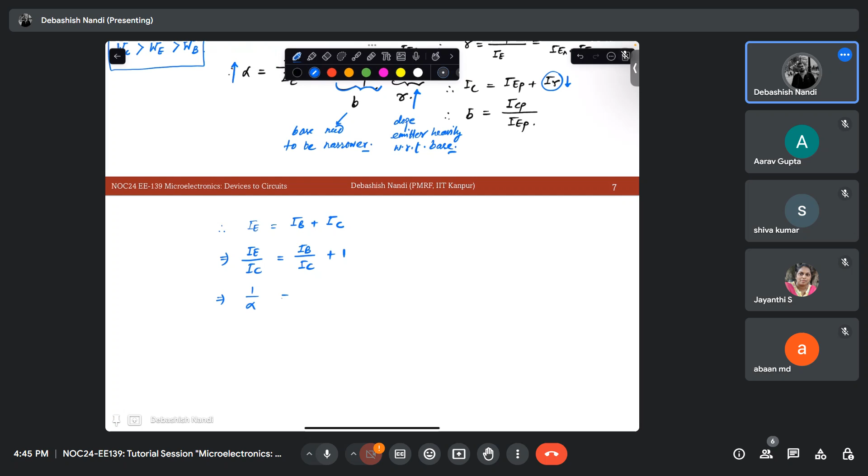So now if I divide IE by IC, and divide every term by IC, plus 1. So what is this quantity? 1 over alpha. What is this quantity? 1 over beta. So they want us to find out alpha, right?

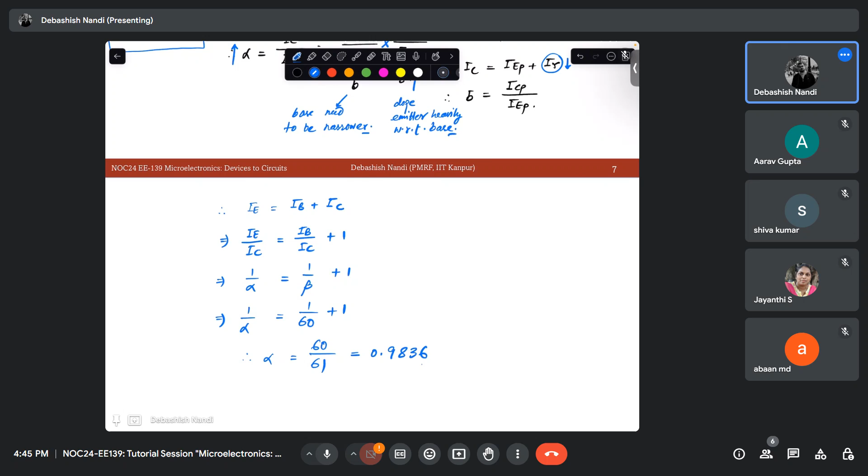So 1 over alpha is equal to 1 over 60 plus 1. That means your alpha should be 60 over 61, which you will get as 0.9836. So if beta is given, you can easily find out the alpha.

But don't only solve the problems in terms of numbers. Try to visualize what is happening inside the device. Then only will you be able to comprehend the entire material - what is happening and how it is happening.

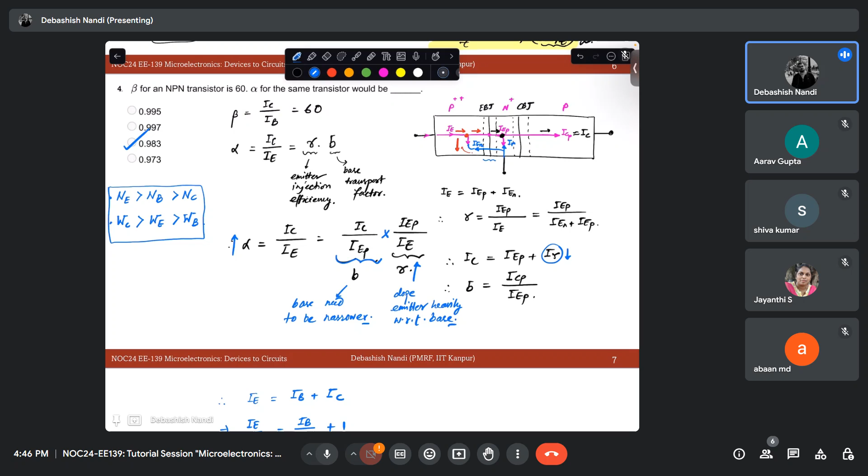So let's move on to the next problem. Base width modulation occurs in a BJT operation in this. What should be the answer? And what is base width modulation, by the way?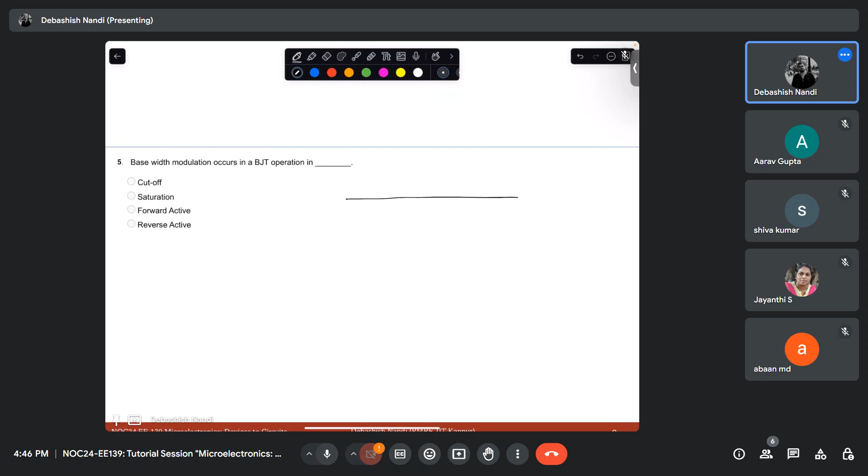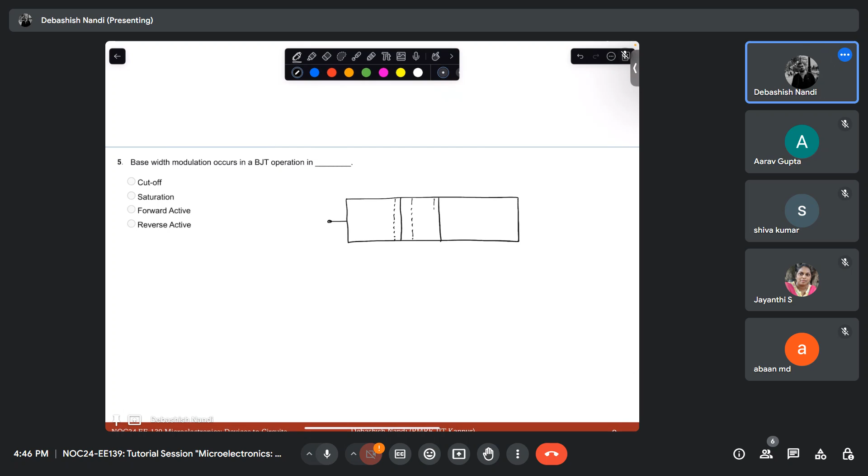Anyone? The depletion region is so wide that it will eat out that base region. Absolutely right. But why does it happen?

And what is the consequence of that? The consequence is that - let's see, this is your PNP transistor.

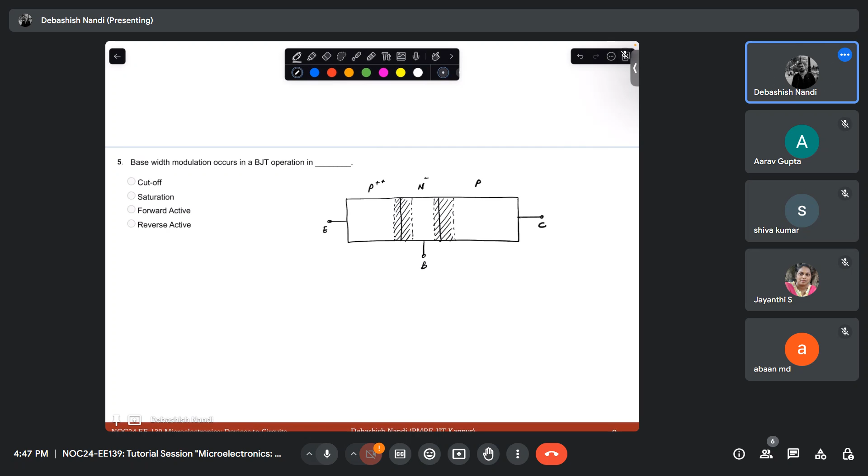So what happens is that, again, what did I tell you earlier - I want my amplifier characteristics to be, what is the ideal I want? I want this to be this, right? The slope I want is 0. What do we mean by slope is 0? That means whatever

VCE I apply, it should not control the current, right? For example, if my device is biased at this point and if I have a small signal on top of that, so what should be my ID? It should be 0. My Y22 should be 0, right? This is my desired property. But what happens in reality is that this slope is never 0.

It happens like this - so slope is greater than 0. What is the implication of slope not being 0? That means your IC is now controlled by VC to some extent, right? But do we want that? We do not want that, right? We want our this junction to control this junction.

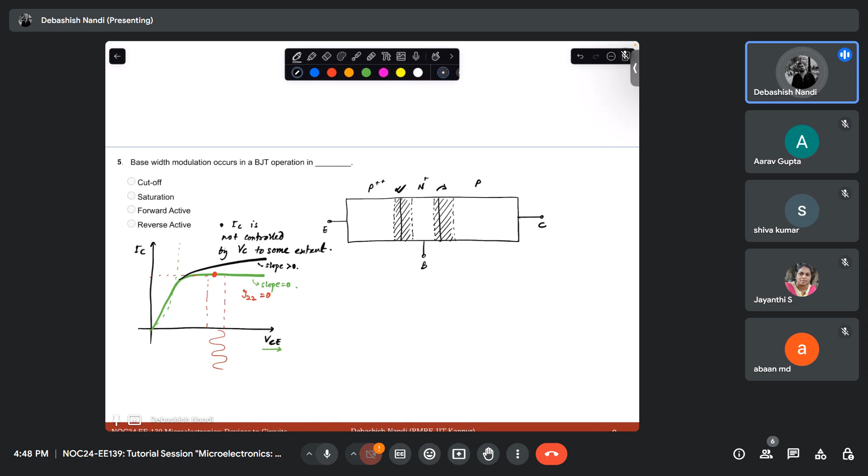We do not want - for example, let's say if VC starts to dominate in determining IC, what kind of device would it be? First of all, it will simply act like a resistor, right? You see, this is an IV characteristic and you have a linear region. That means you will see only a resistance.

It is nothing but this - let's say this is your VC, this is your VB. So if you are sweeping VC, your current is changing, right? That means it is simply a resistor, nothing else. So you do not want that. You want your EBJ to control the characteristics of your CBJ.

Fine. Now what is base width modulation? For example, what is the condition of bias in this region? The condition of bias in this region is forward biased, right? And what is this? Reverse biased, in my forward active region.

Now assume that in reverse bias what is happening - this depletion region starts to expand, right, as I increase my VC. Do you agree that in reverse bias the depletion region of the PN junction increases? Anyone, can you confirm?

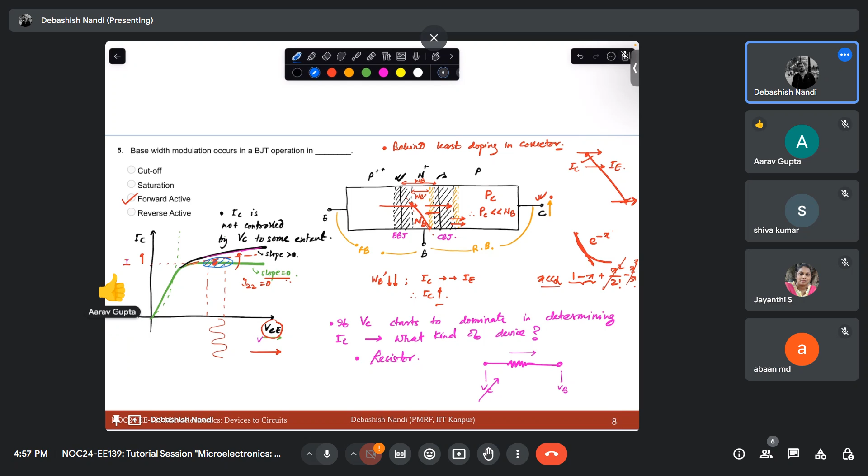Okay, if not, let me answer his question. So what is doping? Who was it? Yes sir, me. So can you tell me - okay, just let me write it here - what is doping?

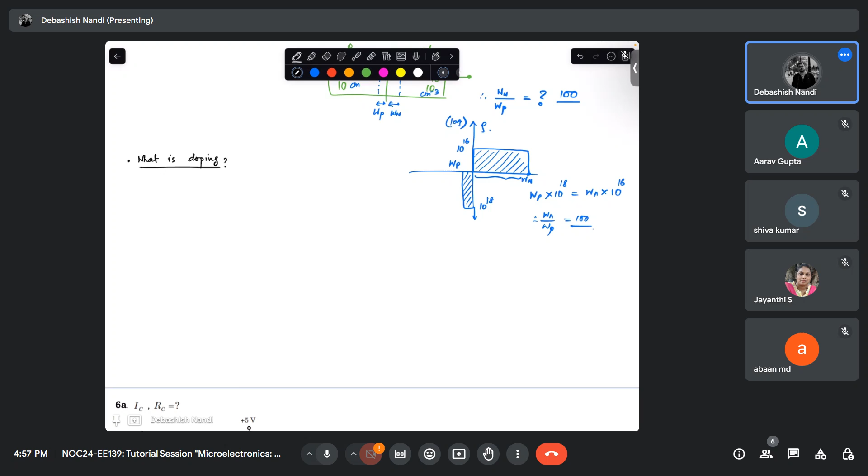Okay, so first thing is that your silicon is a crystal. Do you know what is the distance between these two atoms in silicon? What is this called? Lattice constant, right? It is 5.43 angstrom. What is angstrom? 1 angstrom is 10 to the power minus 10 meter.

So in 1 cubic centimeter, how many atoms of silicon are there?

It is around 10 to the power 22. 10 to the power 22 silicon atoms are there in 1 centimeter cube volume of silicon.

Now what is happening? Let's say you have some gun through which you are doing ion implant or diffusion. By diffusion process, let's say you are trying to dope it in p type. So what material should you use? A trivalent material. For example, let's say boron, right?

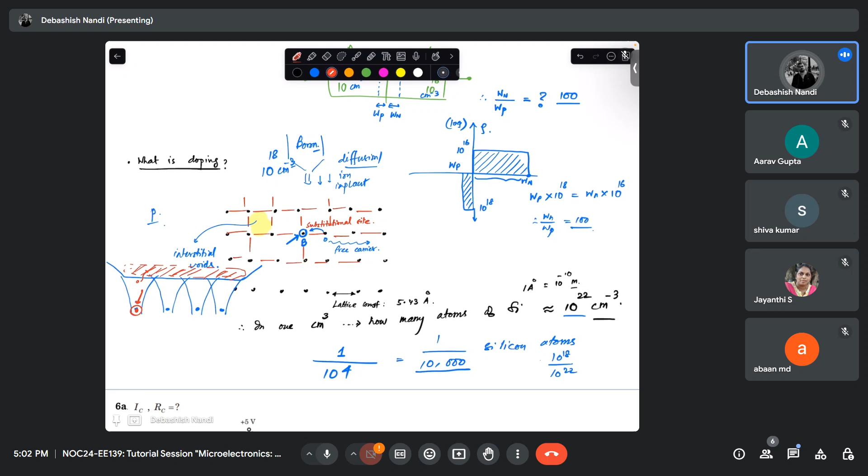Does that answer your question, or do you have anything more in depth you want to learn about this? We can discuss, you can ask a question. No sir, got it, okay fine.

So similarly, your N type is also there, P type is also there. This is the notion of understanding what 10 to the power 18 per centimeter cube means. Always keep it in mind that it means in 10,000 atoms I have one boron atom.

And what about N type 10 to the power 16? That means 10 to the power 6, that is in 10 lakh silicon atoms, I have one, let's say, phosphorus. This is how you should understand and visualize the doping.

We can go much deeper into quantum mechanics, but that is not the purpose of this course. In the first lecture, in the comment section, I mentioned one of my previous courses where I discussed quantum mechanics in detail. For any in-depth discussion on band diagrams or semiconductor physics, you can check that out. Even band diagrams in quantitative measures have been discussed there.

Sir, much of the things I didn't understand the concept. To study this course, is semiconductor physics important to learn?

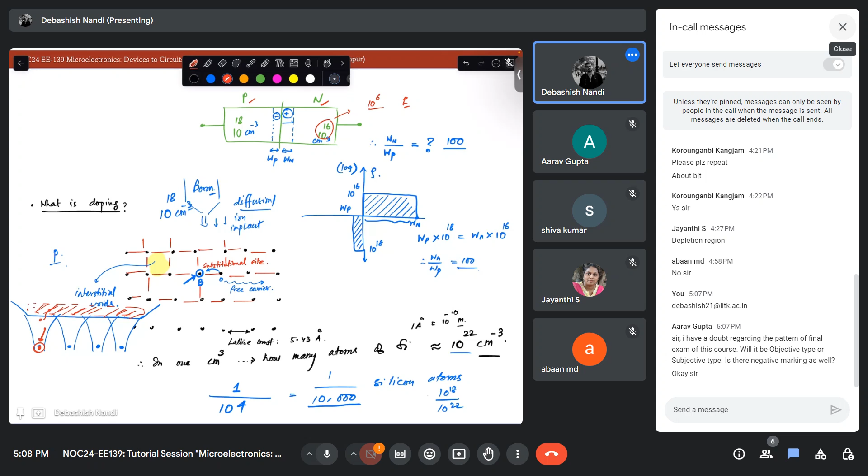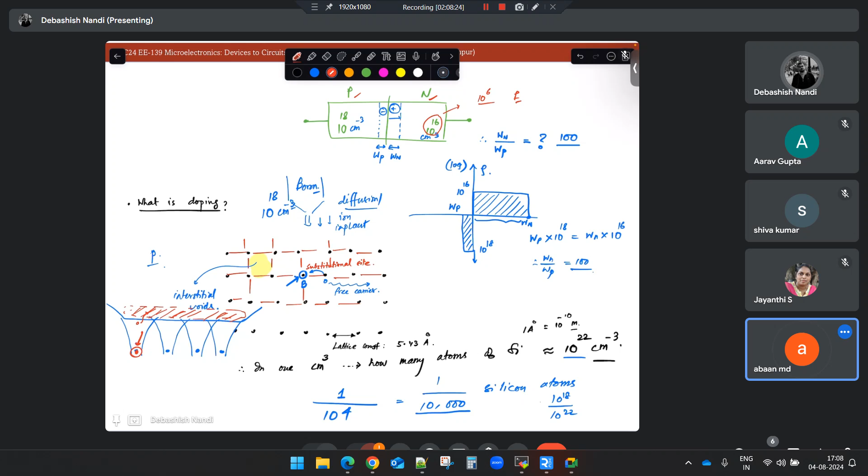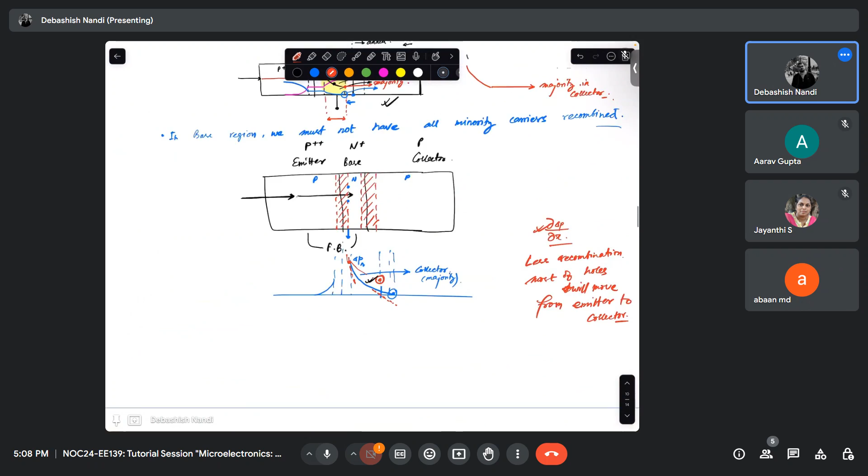Sir, there's one more doubt. So in the top, sir, BJT. Yeah, right, go on. So, still above that. Which one sir, this one.

Sir, we were told that the width of the base is small, like the largest width is of emitter, then collector, then base. No no, the largest width is of the collector, right, because you have all the carriers to get recombined there. So the collector has the highest width, then you have the emitter, then you have the base. Base has the smallest width.

So we have seen - symbolically we used to design BJT like this in a triangular perspective. Where do you see a triangle? Rectangle, for rectangle purpose. This one, or this one, sir? Towards the right, this one.

I'm not able to see the cursor. Okay, just hold on. So this one or this one, which one? This one, the right one, this one.

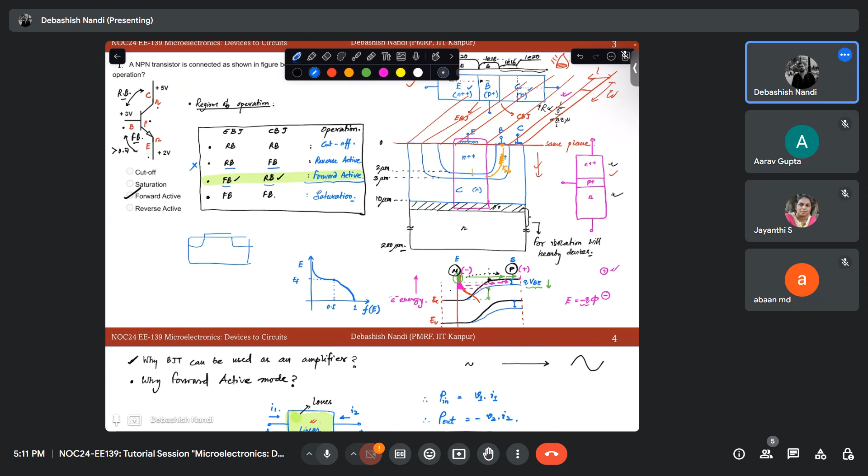Okay sir, so when we talk about area, we always talk about the top view, what is the W and L. For example, if you have seen a MOSFET - this is your MOSFET - on top, how does it look like? It looks simply like this: this is your source, this is your drain, and this is your gate. This is the area we are talking about - this is your length and this is your W. So this area should be minimized, that is the point, not the vertical dimension.